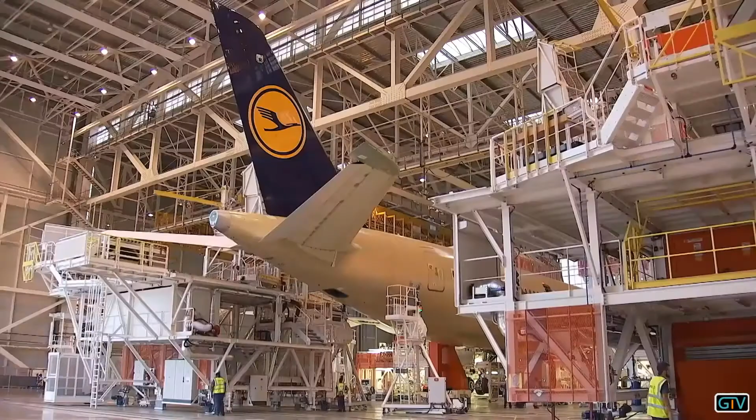Air travel has become an integral part of our everyday lives, connecting the people on our planet. For some years now, competition among airlines has been increasing, competition in which modern super airliners play an important role. The Airbus A350 is one such super airliner. Germany's largest airline has already ordered a significant number of these new long-haul aircraft. But can the airliner meet the high expectations?

The A350's first official flight goes from Munich to Hong Kong. The high-tech jet now has to prove itself under real conditions: a direct flight and a stress test with a duration of 12 hours. It's the most modern commercial airliner on the market.

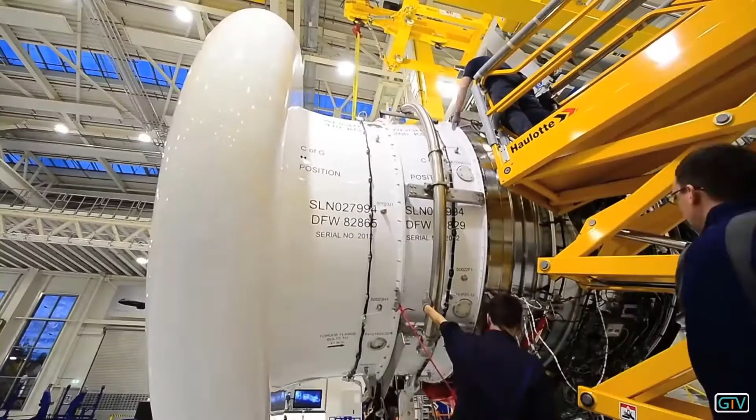The engines from Rolls-Royce have been completely redeveloped and enable the aircraft to carry out extreme flight maneuvers. We'll be pushing the aircraft to its limits here. On a test flight, the new A350 is rolled to a bank angle of 67 degrees.

There are also improvements for the passengers. More space and larger HD monitors are just some of the features. But the current super airliner from Boeing also has a lot to offer: new, larger windows and a completely new lighting concept for passengers on the 787 Dreamliner.

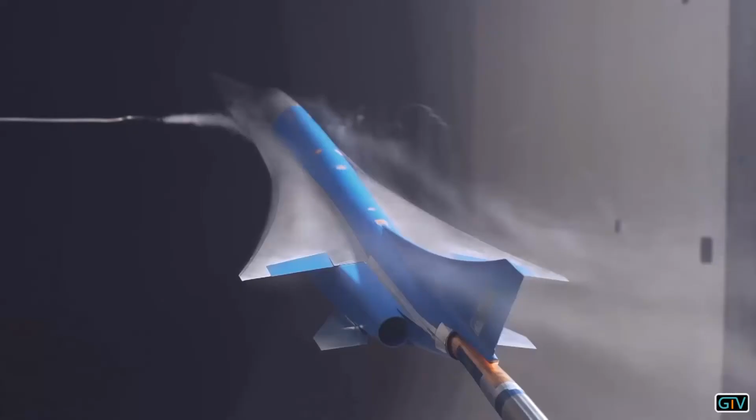London to New York in only 3 hours, possible only by flying at twice the speed of sound. But that's only the beginning. In the near future, even flying drones will help alleviate the traffic chaos in our cities. And developers are looking even further into the future with their concept plane, an example of what the future could look like. This future, we will build it together.

The super airliners for the new millennium are ready to hit the skies.

The Airbus factory in Hamburg. The city on the River Elbe is the third largest construction location for civil aircraft in the world. Around 12,000 people work here in development, design, and final assembly. Besides other aircraft, 2 super airliners are being produced on the 19 square kilometer site: the biggest passenger aircraft in the world, the A380, and the new long-haul jet, the A350.

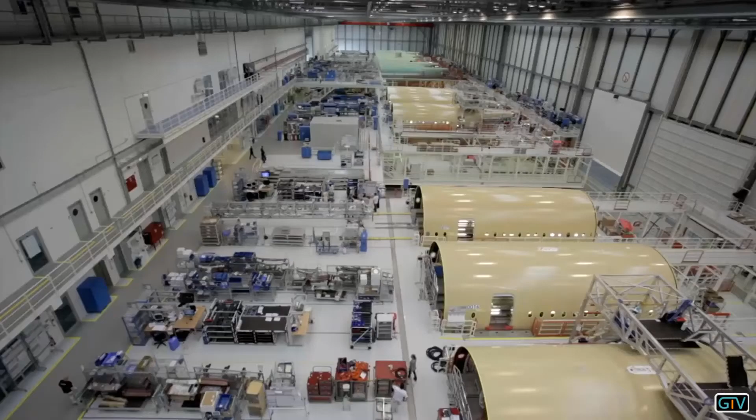There was even a new assembly hall built especially for their manufacture. Here, the mechanical and electrical systems are installed for 2 fuselage sections: the forward section, which starts behind the cockpit, and the rear section behind the wings. At first sight, the individual fuselage sections all look the same, distinguished only by their different production numbers. Everything runs according to a fixed assembly schedule, which begins with delivery of the front fuselage section.

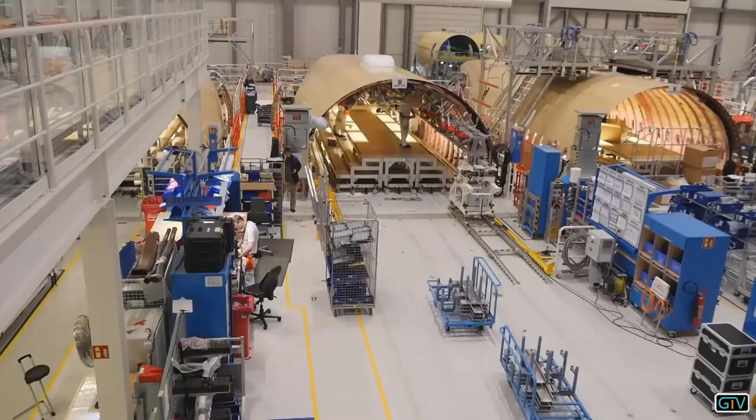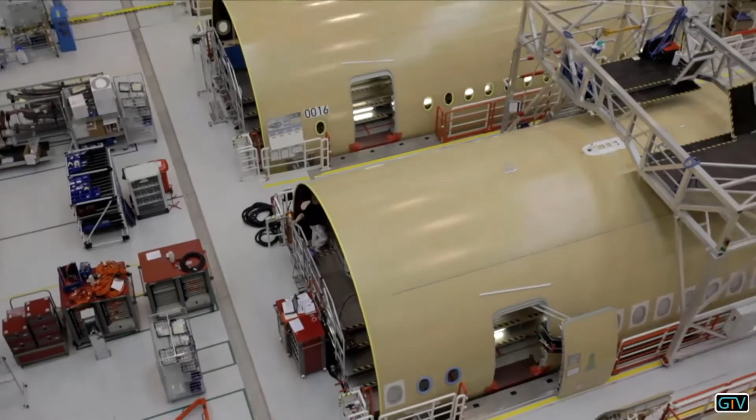The staff here refer to this as the barrel, in which they gradually install the various systems. That is now much faster than in the old assembly hall thanks to the new construction method. For the fuselage and wing structures, more carbon fiber composites are used than in any other commercial airliner.

After only 12 days, one fuselage section leaves the Hamburg works and is flown to Toulouse by the Beluga transporter. This production speed, however, is only possible by using the assembly method known as module integration.

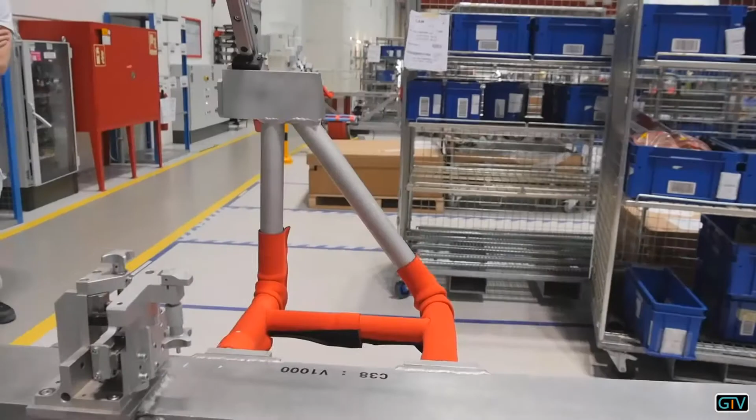That's a very special assembly method here in aircraft construction. The A350 is currently the only program carrying out installation this way in the entire Airbus group. In these frames, cables are laid, air conditioning ducts mounted, and small control devices installed.

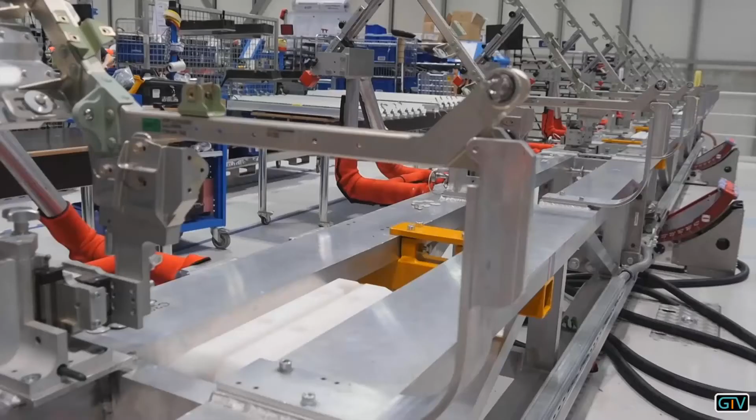The benefit is that there's no more overhead work, as the modules are only installed in the cabin ceiling at a later stage, a great relief for the technicians. However, everything is still installed by hand.

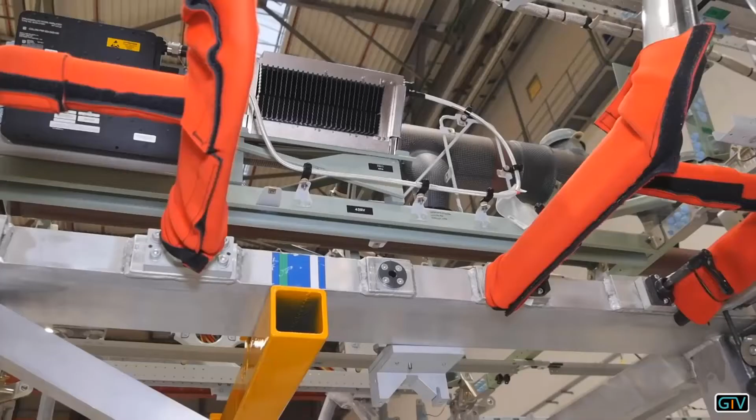The cables are bundled into so-called harnesses and then ducted before these harnesses are also installed into the modules. Each individual line is then checked once again by technicians before being installed in the barrel. If everything is okay, green labels are attached with the letters GTI printed on them.

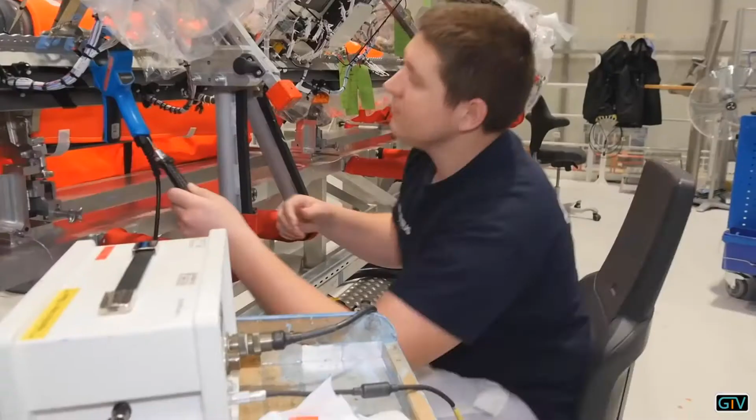GTI stands for Ground Test Instruction, and there's a precise definition for the way we have to check our contact resistances and the rest of the electrical equipment. Electrical resistance is measured at various points with the help of a measuring device. This resistance measurement is extremely important for safety during flight operations.

If the contact resistance or general resistance is too high, or the currents flowing over them get too high, as in a lightning strike, it would lead to a lot of heat developing here, and that's definitely not something we would want in an aircraft.

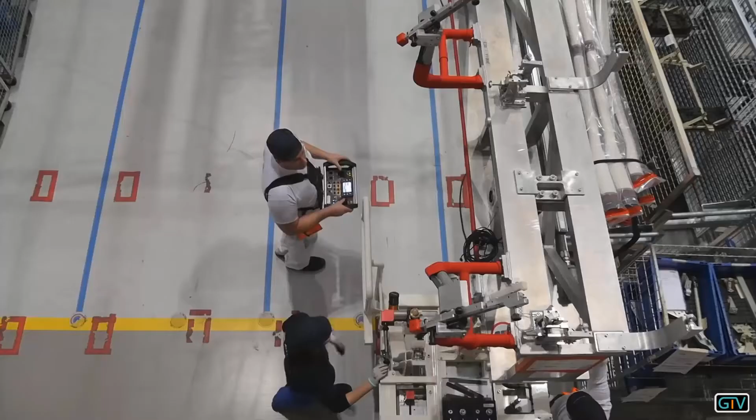Once the module has been assembled, it's carefully transported by crane to the A350 fuselage. The time saved by this new assembly method is enormous. The manufacturer now delivers more aircraft than ever before. A350 production alone now sees 10 aircraft completed every month. This is also due to the passenger cabin being assembled parallel to the fuselage, wings, and tailplane.

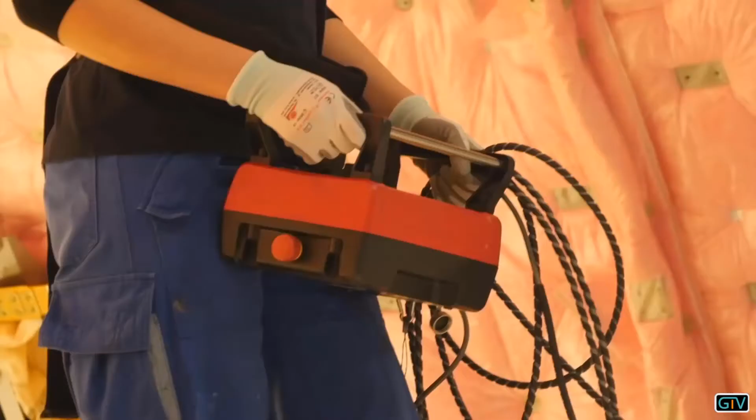Now the retaining bolts are removed and the module is slowly edged towards the fuselage. There are currently 3 versions of the aircraft available. Here, the middle version, the A350 XWB-900, is being built for Lufthansa.

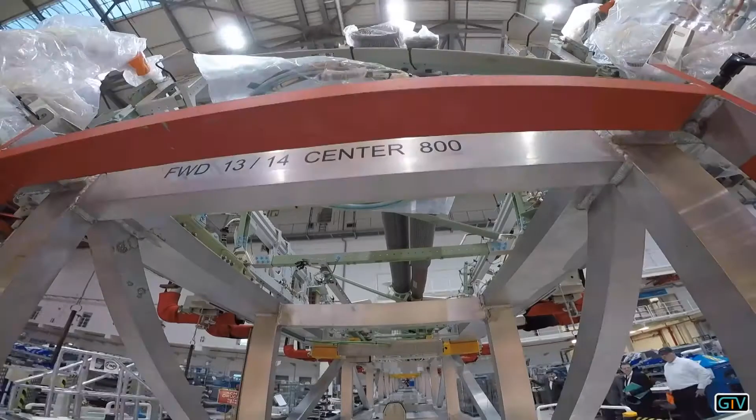The module is slid into the fuselage on a rail. Nothing must go wrong now. The slightest error could bring the entire production to a standstill. The technicians are all highly focused because the safety of future passengers depends on this.

Minor deviations in the height of the module are corrected using adjusting screws. Hundreds of cable harnesses are still hanging down from the module ceiling. They will soon all be laid individually by hand.

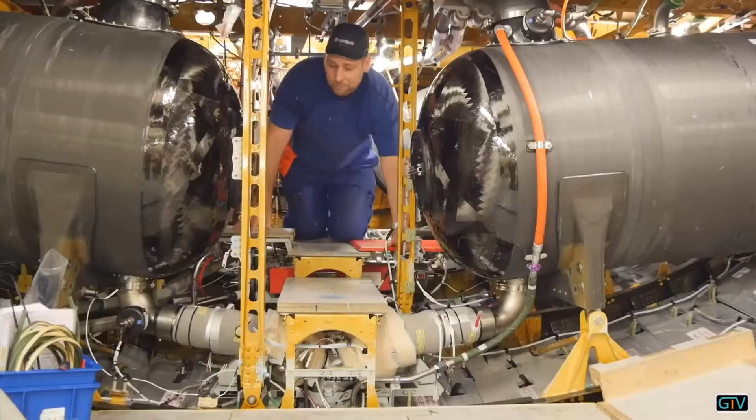While work goes on in the upper section of the cabin, in the lower section everything is finished. We're here in the plane's cargo section, where all kinds of systems are installed that passengers don't get to see. In the rear section, there are the fresh and wastewater tanks.

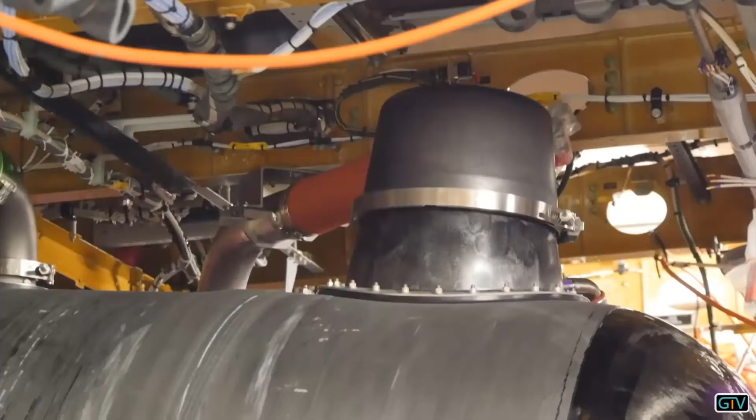There are 2 freshwater tanks installed here, a larger and a smaller one. The larger tank holds about 800 liters and the smaller one around 600 liters. We allow about 40 liters per passenger.

Under this floor paneling is where the A350's oxygen supply is installed. The supply lines are well protected in the middle of the fuselage. Here too is all the cabling for the cargo system. This automatically guides the freight containers into the fuselage and ensures the load is correctly positioned.

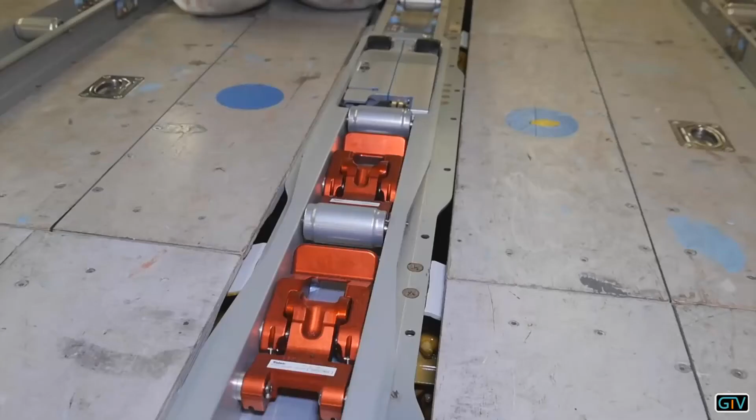Here we've installed the cargo loading system. These are the roller conveyors. They consist of different compartments where the luggage or the freight can be loaded onto, and so it arrives at its destination safely without slipping.

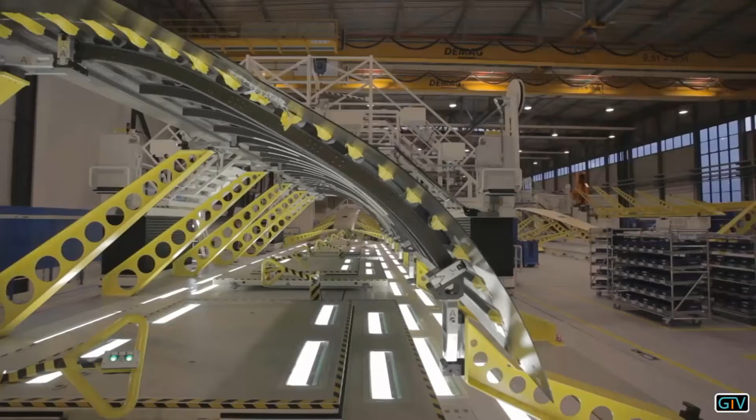After 15 years of development, the A350 will now succeed the Airbus A340 as the new super airliner. The way it's produced is also completely new. New materials demand new manufacturing methods. Special bolts are used to connect the fuselage sections.

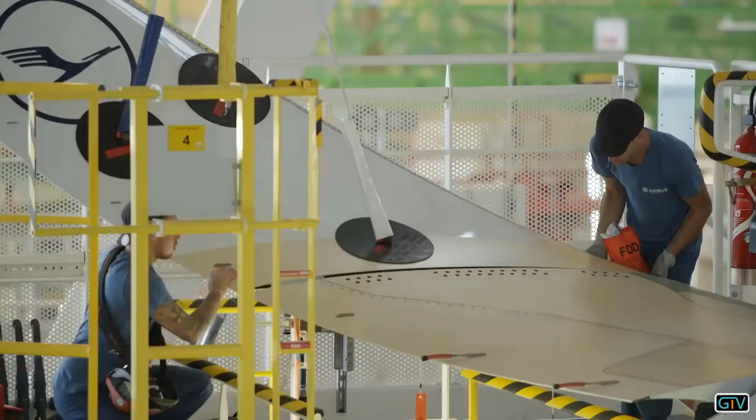The A350 also has reinforced high-speed wings. They are made of CFRP, a carbon fiber reinforced plastic, making them suitable for higher speeds. The extremely smooth wing surface the CFRP creates results in less air turbulence, which in turn means reduced air resistance and consequently more lift. This guarantees greater stability and at the same time 4.5 tons less weight.

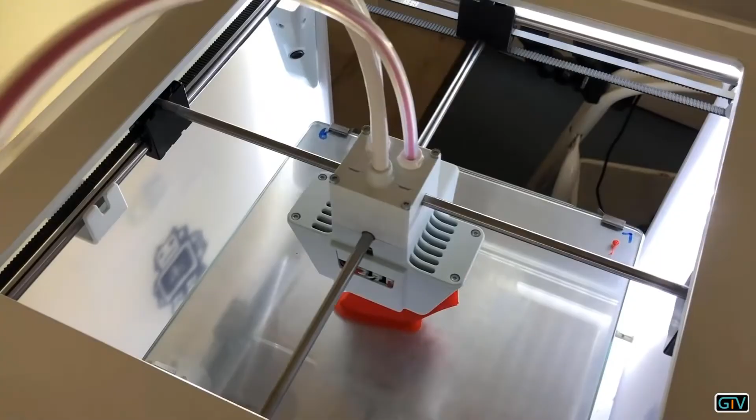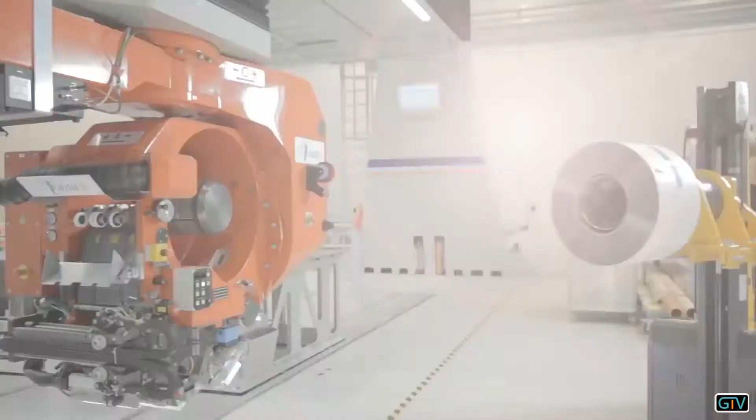To build these wings, a completely new process is used. Similar to the principle behind a standard 3D printer, the wings are built up layer by layer. Here, a small model of an aircraft wing is produced, but in the plant at Stade near Hamburg, the upper level of a full-sized wing is printed with the help of a giant roll of adhesive tape.

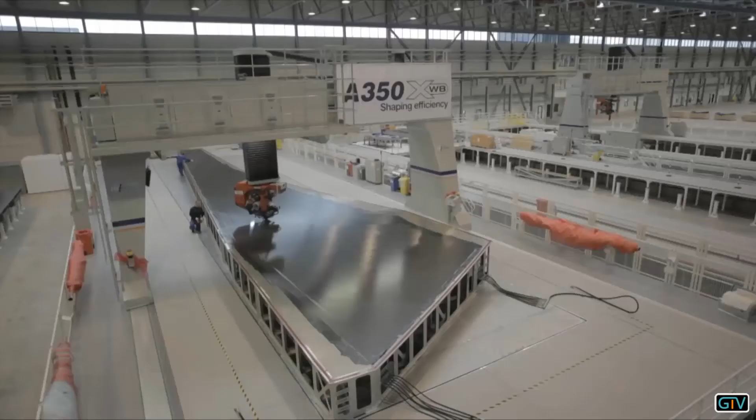On each of its long sides, there are 12 rotating spools which unroll black strips of CFRP. Large aircraft manufacturers are increasingly using this material to save weight, kerosene, and money. CFRP is stronger and easier to work with than aluminum or other metals. It's also much lighter. In the development of the new super airliner, cooperation with the various airlines is extremely important.

It's a continuous process. Based on our experience in daily scheduled operations and close contact with the manufacturers, Airbus, we help to develop new solutions for future aircraft, which can then later be found in our own fleet.

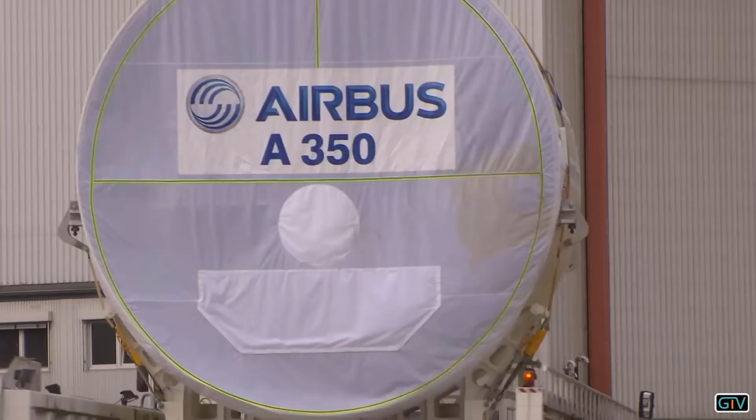All A350 parts manufactured in Hamburg are flown to Toulouse for final assembly. This is where the super transporter Beluga comes into its own. The Beluga is the aircraft manufacturer's backbone. It can carry up to 47 tons of freight, the equivalent of about 10 fully grown elephants.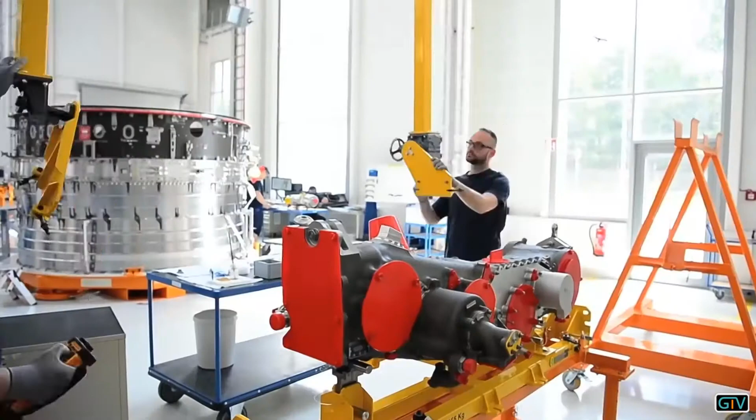Rolls-Royce MTOC in Dahlewitz-Brandenburg is the location for assembly of the new A350 jet engine, the Trent XWB. The airliner has 2 of them. Dahlewitz is the 3rd largest of Rolls-Royce's production sites. 2 XWB-type jet engines are built here every week.

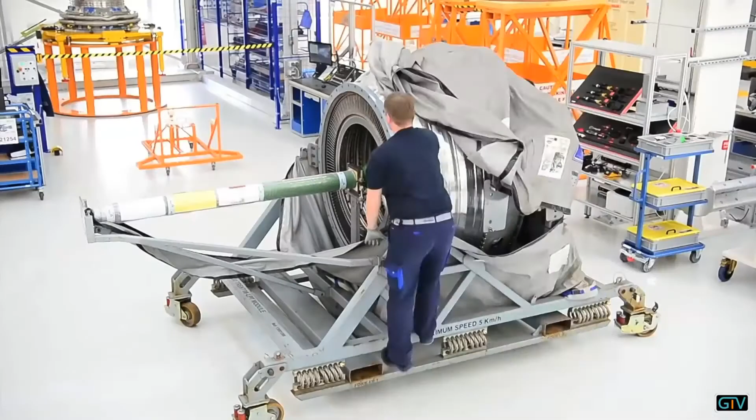With a diameter of over 3 meters, they are among the largest and most modern jet engines in the world. Here too, most of the work is carried out by hand. Around 70 highly qualified engineers and technicians work here, putting together thousands of individual pieces like a huge 3D puzzle.

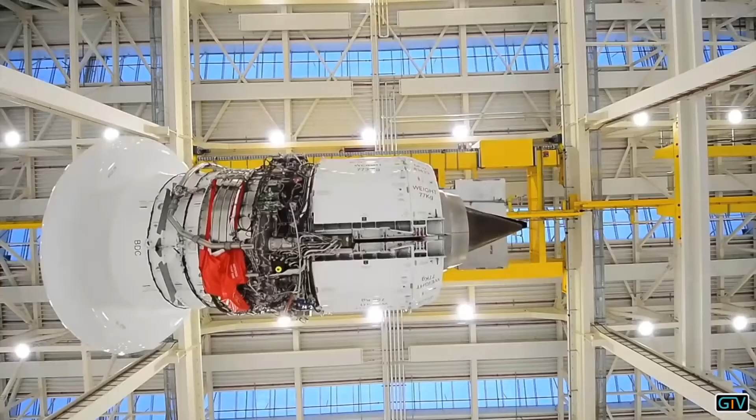After final assembly, the engine is tested thoroughly. Up to 40 different tests can be carried out in this 7,000 square meter facility. Only when all of them have been completed successfully is the engine transported to the Airbus factory in Toulouse.

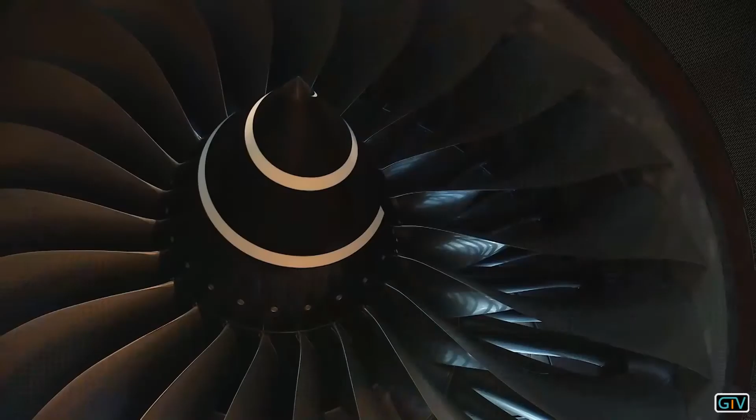Toulouse in southern France. This is the aircraft manufacturer's largest production location. It even has its own airport. The engines delivered by Rolls-Royce MTOC are now mounted onto the A350. A short time later, the new aircraft stands completed on the apron.

She's been given the name Bonne. The technicians have just installed the improved sharklets. Their special shape causes less turbulence and so reduces air resistance. The air flows more evenly past the wingtips, which increases the plane's range and reduces its fuel consumption.

Calculated in terms of consumption per passenger over 100 kilometers, the new A350 uses just under 2.5 liters, which at the same time enormously reduces its CO2 emissions.

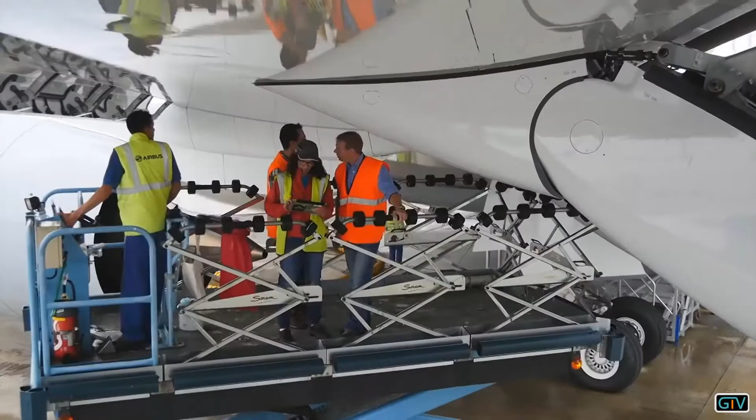In Toulouse, in the pouring rain, the final checks for the new airliner are underway. Everything is inspected and documented meticulously. As the machine is being delivered to the airline today, its own technicians are examining it particularly closely.

I'm in charge of quality check for the A350 here at the final assembly line and for deliveries. And you've just seen me up on the fin where I checked sealants and paintwork to see if anything's flaked off here and there.

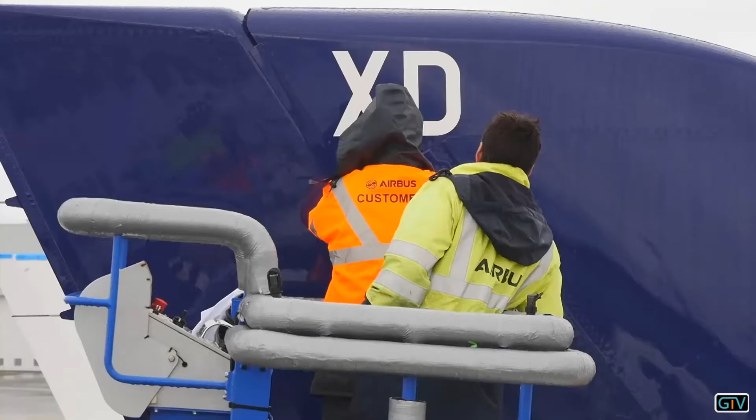Minor problems are marked with green adhesive tape. At a price of 265 million euro, nothing is left to chance. To assess the paintwork better, it first has to be wiped dry. A slight scratch is visible on the back of the rudder. Nothing serious, it's marked and will be polished out later.

Meanwhile, in the nose cone, the plane's radar system is being checked. It is located in the cone directly in front of the cockpit and is essential for information on weather conditions and airspace control. The inspection is completed and the test crew are very satisfied.

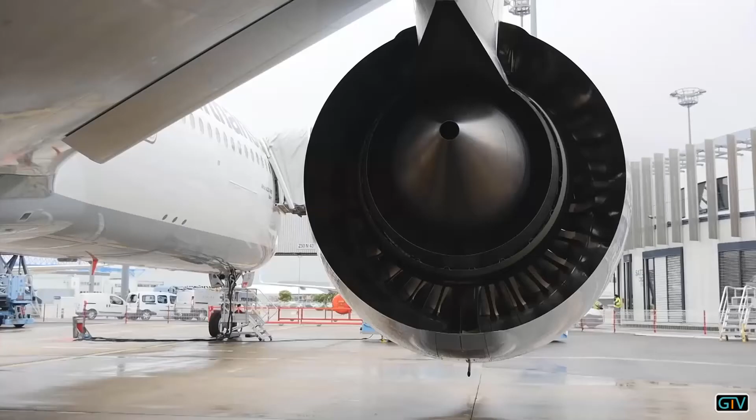The aircraft is now ready for takeoff. At the briefing, the planned test flight is now discussed down to the most minuscule detail. I'd suggest, first of all, that we do a pull-up, plus 0.5 G. Yeah, I got that. This particular maneuver briefly creates weightlessness inside the craft.

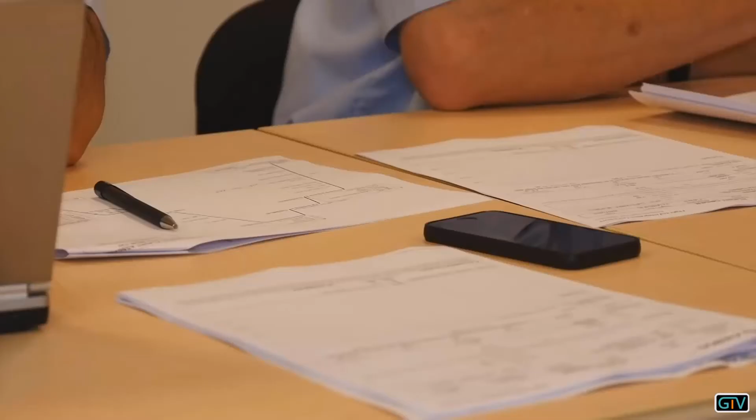Then they plan to roll the plane over on its side. A lot depends on the weather, which currently doesn't look too good in Toulouse. Benna Opsmeier is the captain on the flight and has years of experience. Taking account of the weather conditions, the flight plan is modified slightly so that all the tests can be carried out.

This test flight is all about flying to the aircraft's limits, checking the so-called protections, the safety systems. An aviation engineer is also on board. My role on board is the flight test engineer and the test conductor, guiding the different sequence. An important task for the test flight ahead.

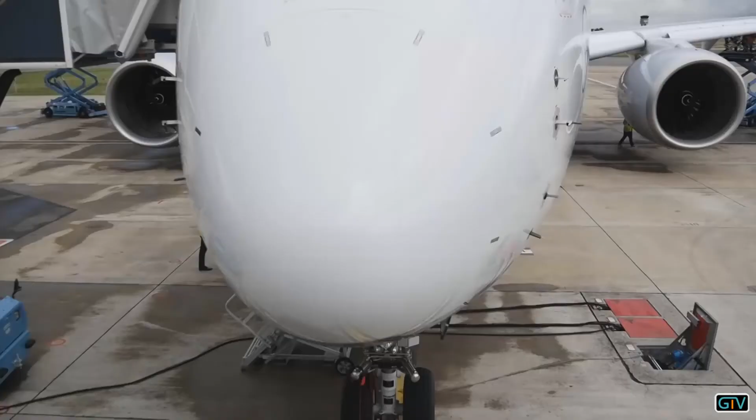The pilots are ready and start preparing the A350 for takeoff. This test flight is also the acceptance flight. Only if everything goes smoothly and no major malfunctions or problems occur will Lufthansa take the aircraft.

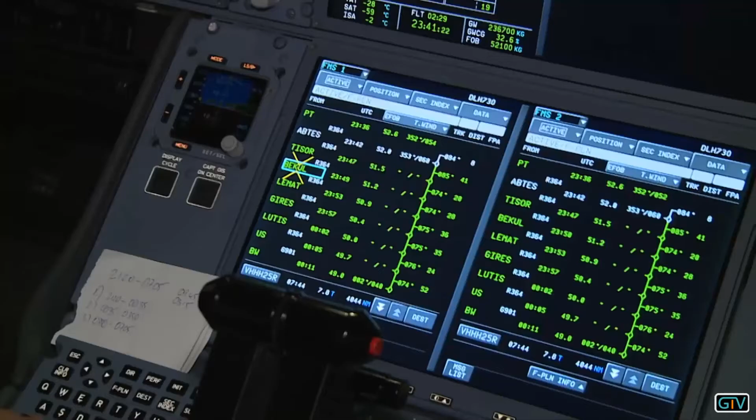The cockpit design has changed slightly and is now a two-person glass cockpit. A new feature is the mushroom-shaped mouse control handrests, which are also used in the A380. The display is made up of 6 38-centimeter LCD monitors. The content can be selected freely by the pilot.

The aircraft slowly moves off. Everything looks good, and the pilot gives the order for takeoff.

While the landing gear is still being retracted, the first readings come through. Engine performance, speed, and cabin pressure are all within the normal parameters. The new Rolls-Royce engines and optimized aerodynamics reduce the aircraft's noise footprint by 30%, putting it well below the legal limits. The first test is a tough one.

The aircraft flies horizontally at maximum speed, around 900 kilometers an hour, and then goes into a climb. After only a few seconds, it reaches the apex of its trajectory. The engines are now throttled back so that the thrust only compensates for the air resistance. The nose of the plane now points towards the ground again.

In this phase, a clear reduction in gravity can be experienced in the cabin, almost like in freefall. Towards the end, the pilot pulls out of the dive by raising the elevator and ramping up the engines again. Test successfully passed. Now it's on to the next challenge.

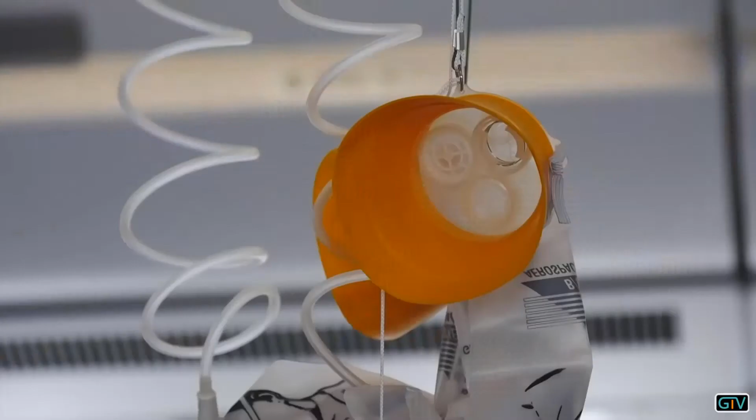In today's test, only one of the many oxygen masks is released. The others have already been tested and found to be working perfectly. In an emergency, the aircraft's automatic system takes over.

All the tests have been completed successfully and the team returns to Toulouse. After a 2.5-hour flight, the aircraft touches down at the company airport. A total of more than 40 different tests and maneuvers have been carried out.

The crew is satisfied, and the plane can be taken over by Lufthansa. However, there are still a few minor issues to be sorted out. After landing, everything is carefully checked and examined once again. To cool the machine down quickly, all hatches are opened and covers removed.

Time for the test crew to evaluate the data and make a final assessment. There's always a great feeling when you see the plane flying at its limit.

Martin flew it really well again, along with Wolfgang Abtsmeyer. It's quite frightening when you're at an angle of 67 degrees and you can see France flying by down below. That's what makes for really excellent flying with this aircraft.

Competitors Boeing are also relying on high tech and have built their own new super airliner, the 787 Dreamliner, which also boasts lower fuel consumption thanks to modern materials. These advances increase efficiency, simplify the operation of the aircraft, and provide noticeable improvements to the passenger's experience.

One of these innovations are the 787's new larger windows. Most people are going to say, I really like the windows. And they will, and that'll be true. But there's a lot more going on besides the windows that you can't even see, that we did on this airplane. And you're just going to feel better, and you're not going to know why.

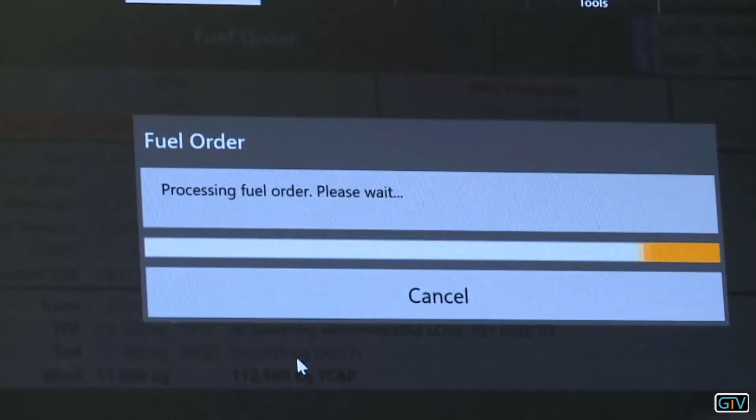So you've not flown the new route to Hong Kong yet either. Neither have I, but I was involved in the calculation. So I think we can order the fuel. Would you agree with 71 tons? Right, I'll enter that then.

Not long until takeoff. In a final meeting, the latest flight and passenger data are checked. The flight attendants are divided into teams, and the special features of the new aircraft are discussed once more. It flies faster than other aircraft and only takes 10 hours 30 minutes from Munich to Hong Kong.

Then the crew make their way to the brand new plane. The A350, named Bonn, has only just been delivered to the airline by the manufacturers. It has a completely new, wider fuselage, new high-speed wings, and newly developed engines. Fueling is already underway.

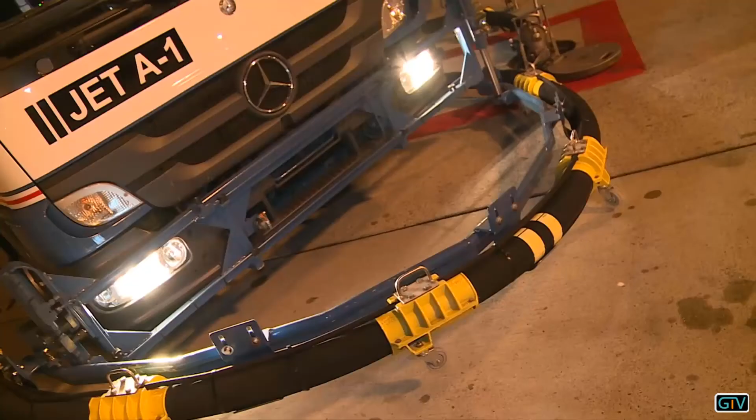Before takeoff, Captain Jasper carries out the so-called ground check, in which he personally inspects the exterior of the machine once more. Obviously, I can't see inside the system, but there are certain places you can look at to make sure they're in order, indicating the general condition of the aircraft.

The A350 Bonn is ready for takeoff. The pilots take up their positions in the cockpit. For safety reasons, there are always 3 pilots on long-haul flights who alternate regularly.

The final provisions are stowed away in the cabin. It's all brand new on this aircraft. You notice that as soon as you come on board, everything smells new. We're very proud that it's the staff based in Munich who are the first to fly on this plane.

And now the first passengers also come on board. The flight attendants have to deal with a completely new system. Though it's all been practiced in advance, things are often different in reality. Some things are not where they should be, but in general, everyone is satisfied.

It's definitely very pleasant, there's more space. Of course it's a change from the A340, because there are 2 galleys here now, at least in the new business class. The caterer has delivered the food, the cockpit crew is ready for takeoff, the passengers are on board, the doors are closed, we're taxiing, and I'm really looking forward to our flight to Hong Kong.

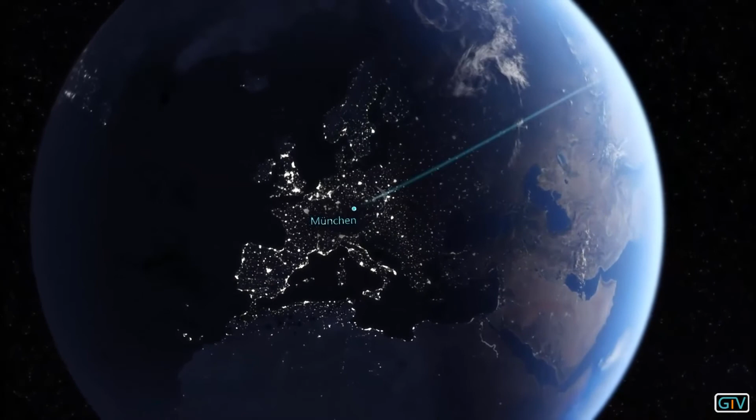With 325 passengers on board, the aircraft taxis to the runway and sets off from Munich to Hong Kong. On her first regular flight, she will cover some 9,000 kilometers without a stopover.

Speed has always fascinated people. Ever faster cars and high-speed trains seem to make distances shrink. In commercial aviation, too, things are happening. Boom Technology is building an aircraft to fly from Munich to Hong Kong in just 4 hours.

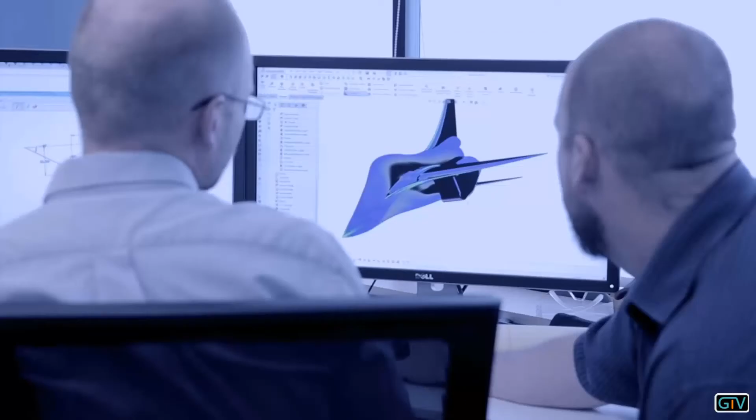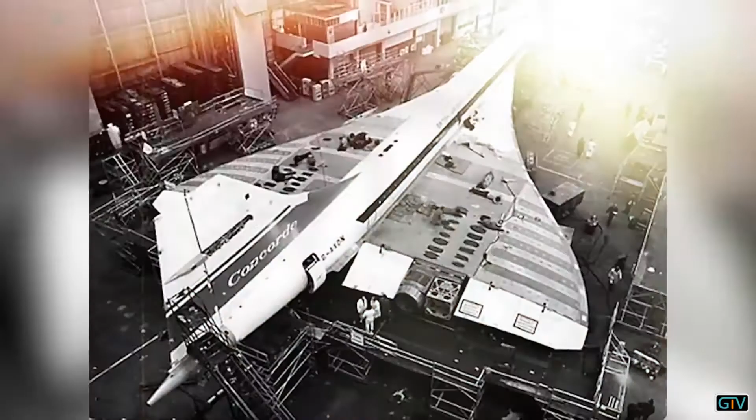To accomplish our goal of affordable supersonic travel, we challenged our engineering team to create a design at least 30% more efficient than Concorde. Concorde was the world's first supersonic passenger airliner. It went into service in 1976, covering the Paris to New York route in less than 3 hours.

After an Air France Concorde crashed in July 2000, the service was discontinued. For the first time since Concorde, supersonic passenger flights could soon be in the skies again. The U.S. company Boom believes new materials are the key to achieving this.

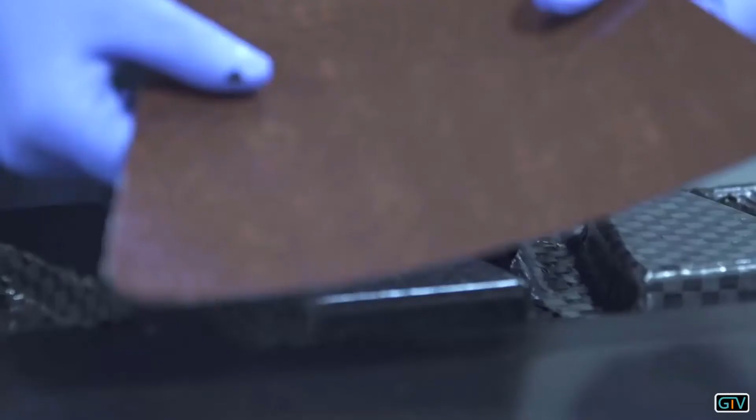Carbon fiber composites allow us to realize the aerodynamic design with a strong, lightweight structure. To create a carbon fiber part, we first start with a high-precision mold, either CNC machined or 3D printed. We then apply layer after layer of carbon fabric and resin to the mold. Finally, each part is cured in an oven or autoclave under vacuum at temperatures of up to 450 degrees Fahrenheit.

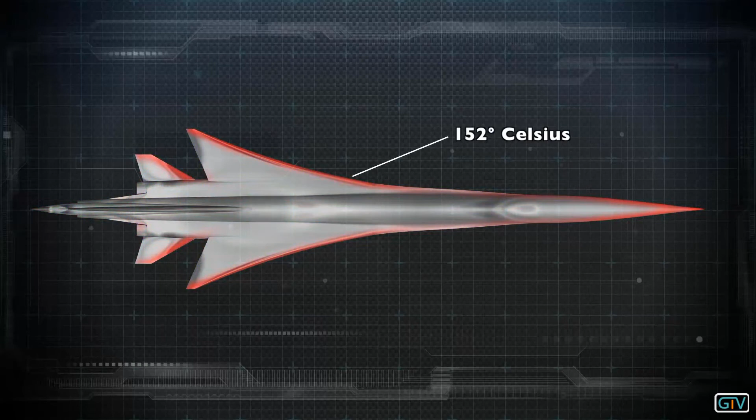Cruising at 1,451 miles per hour, the nose and leading edges of the aircraft can reach temperatures of up to 307 degrees Fahrenheit. These carbon parts outperform aluminum at the high temperatures of supersonic flight.

The propulsion system is composed of a variable geometry intake system and an efficient turbofan jet engine. Our engine is based on the same technology that powers modern subsonic aircraft, but with a customized fan and a variable geometry exhaust. Lastly, we use 3 engines for added reliability and safety - 2 engines under the wing, and a third in the tail.

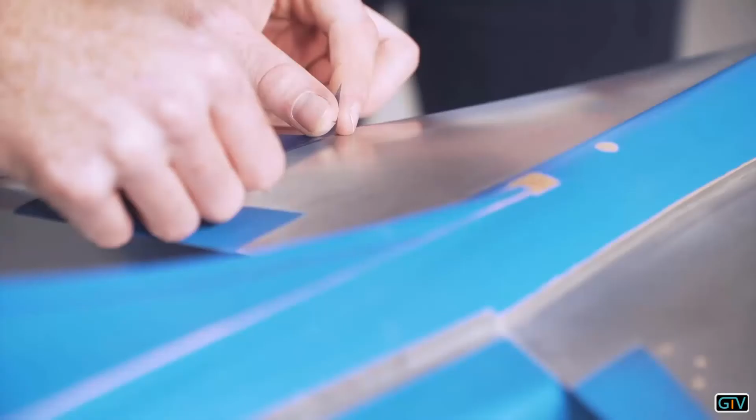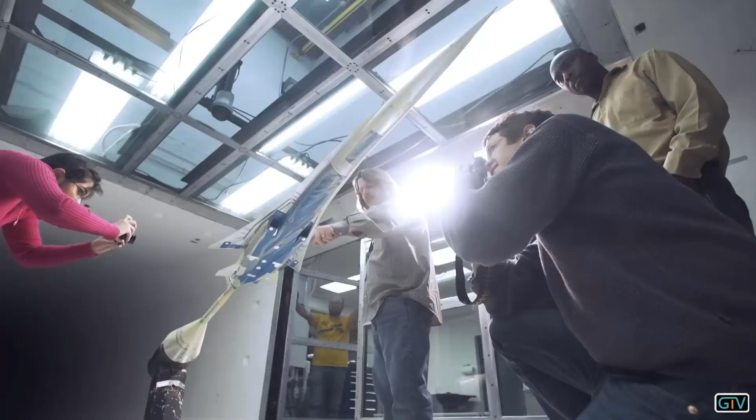Before actual construction of the new super airliner can begin, a lot of testing has to be carried out in the wind channel. A small model is built and covered with different materials. This is done to determine the behavior of different materials under strong wind resistance. If it is torn off or deformed, a better material has to be developed. Testing, however, is going very well.

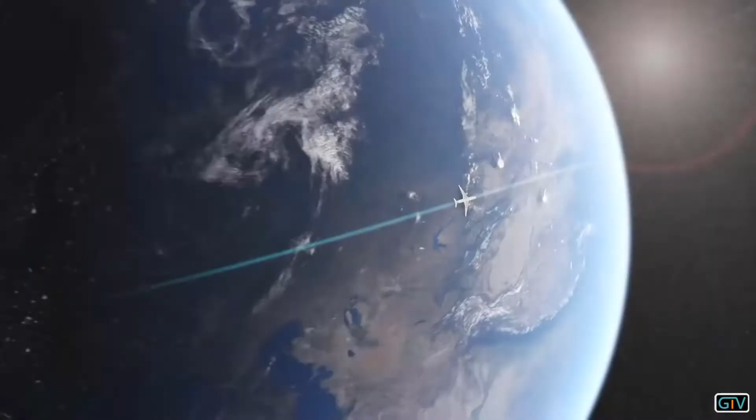With a flying time of only 3 hours from London to New York, the engineers decided against seats with recliner function, preferring instead modern communications technology ideal for business travelers. On its maiden flight to Hong Kong, the A350 isn't quite as fast, flying through the night at 950 kilometers per hour. We're here in the larger central galley.

The A350 has a few new improvements which other airliners don't have. There's a refrigerator where passengers can help themselves. We have a few environmental innovations for disposing of leftover food and drinks. And we also have a self-service area to make sure our guests are always provided for. The air on board is also much better, a luxury that all classes benefit from.

This makes the cabin pressure feel lower, and as this is a long-haul aircraft, it contributes to making the journey in the A350 feel more relaxing. There have been a few changes to the seats too. They are wider and more comfortable throughout the entire aircraft. Even in economy class, new standards of seating comfort now apply. The high-quality mounts and brackets here lead to significantly less vibration in the seats themselves.

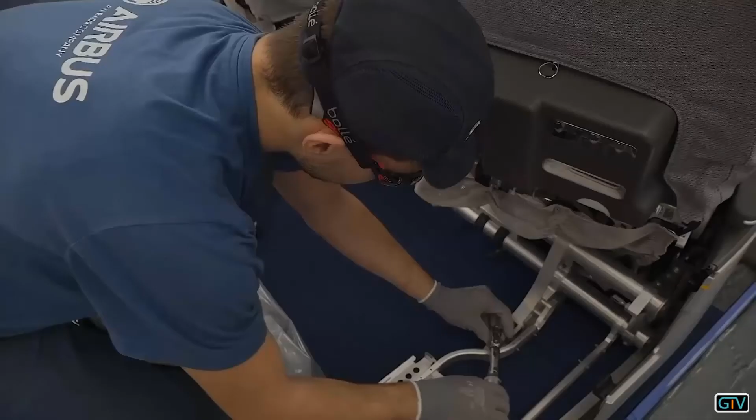We're in economy class today. This would have been business class only a few years ago. If you look at the seat, we have 18.5-inch wide seats, better than any other aircraft flying in the skies today. 17-inch seats have been standard in many aircraft up to now - that's a little more than 43 centimeters. The 17-inch seat is the seat that prevents you from movement, it prevents you from getting comfortable during that flight.

Our industry is changing, and the needs of passengers are changing as well. A study has shown that the sleep phase for people in 18-inch seats is much longer and more intensive than in 17-inch seats. As the research has shown, 1 inch makes all the difference.

Onboard comfort has also improved for the A350 crew. They now have a proper sleeping cabin for up to 6 people. This is the so-called purser bed for me and my purser colleagues, because it's closest to our interphone. The purser is the one in charge of communication, who has to make the phone calls, and this way you can make your own little comfort zone.

Another super airliner is the Boeing 777. Like the A350, it's used by all the leading airlines. The cabin equipment is modular and can be converted as required. In the 777, wider seats and improved cabin air are important features.

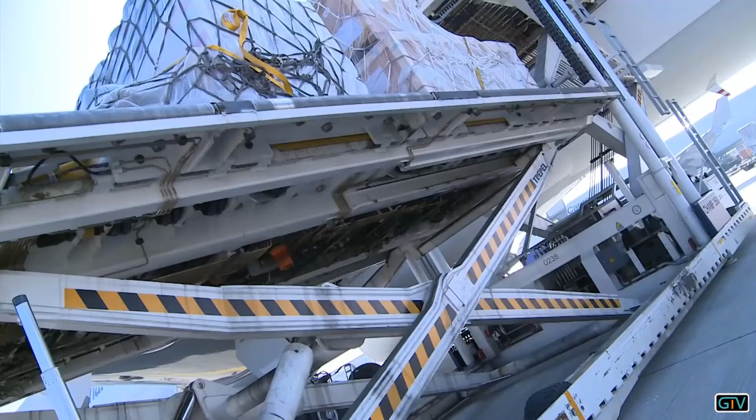The 777 has a revolutionary new loading system, with which freight containers are loaded onto the aircraft by a lifting platform in a specified order. Each container weighs as much as a small car. The heavy containers are first transported to the upper deck of the hold by a sophisticated elevator system and then distributed evenly across its entire area. The procedure continues on the middle deck. Only at the end of the operation is the lower deck filled.

Behind the cockpit, there's a small kitchen through which the crew members can access the hold. Captain Frank Lumnitzer checks the cargo. There's not a lot of space left for him to get through. Anyone used to a passenger cabin will find this a little unusual.

We've loaded 98,700 kilos of freight. I don't know yet the specifics of the cargo. I'll get that afterwards from the handling agent. Ultimately, it's freight that's either valuable or that has to be delivered punctually from A to B.

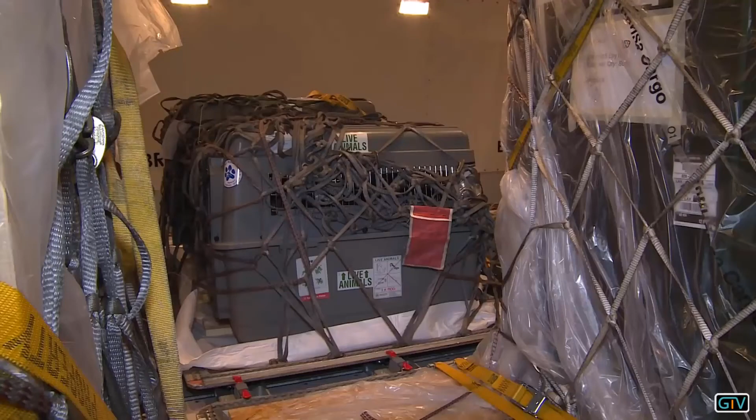In here, two Greyhounds are waiting for takeoff. The freight documents have now arrived and are all in order. So now to the external inspection of the 777.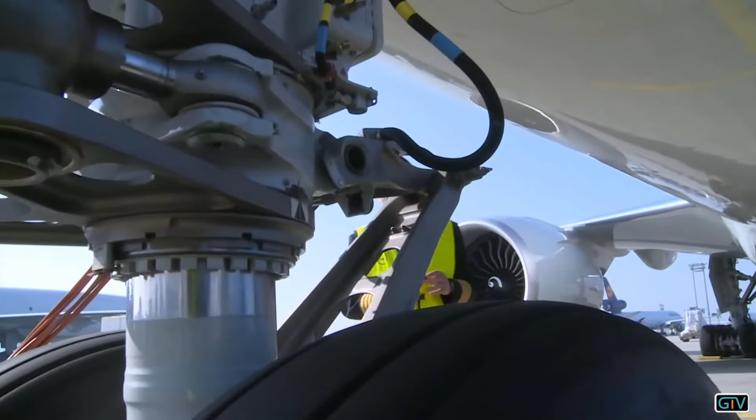A routine exercise for Captain Lumnitzer, who is flying the aircraft to Chicago today. Our technicians have prepared the aircraft, and it's now down to me as captain to get my own impression of the condition of the aircraft.

Boeing 777s are equipped with the most powerful engines available in commercial aviation. They have a diameter of well over 3.5 meters and generate thrust of over 110,000 pounds.

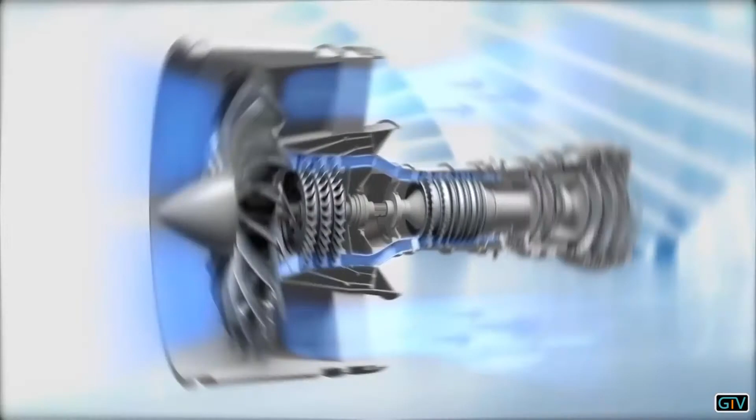What makes this General Electric engine so outstanding is a special kind of air compression. Air is continuously compressed over a number of individual compressors, also known as fans, before it's mixed with kerosene. This mixture is ignited and drives the turbine. The turbine exhaust then provides additional thrust and turns this engine into a super engine.

The Boeing 777 is now ready for departure. So, it's time to go. We're off to Chicago, and we want to be punctual. With a range of 11,000 kilometers, the 777 operates a network of almost 300 destinations from Frankfurt.

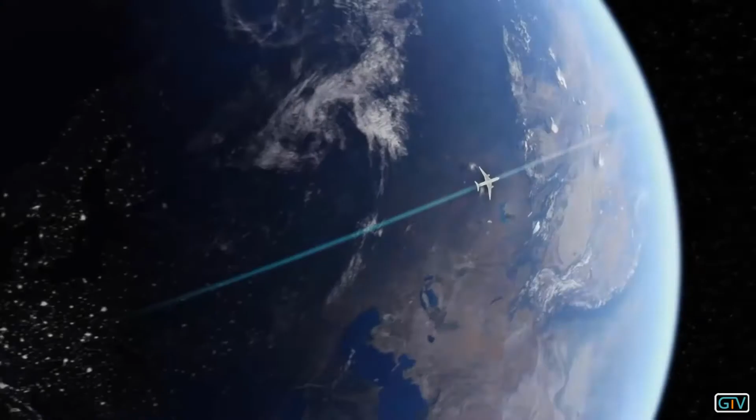Back on board the A350, Hong Kong is already drawing much closer. The plane is just crossing the foothills of the Himalayas. Below us, the 6-kilometer high Tibetan plateau, but the aircraft is running well, the systems are working excellently, and the fuel calculation we made in Munich seems to be working out.

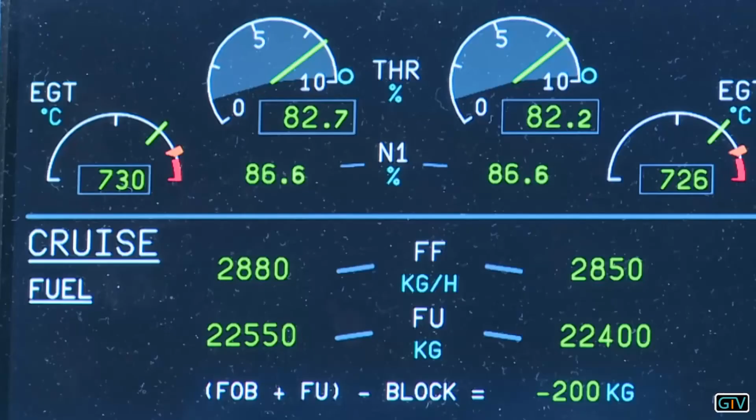We'll have enough reserves when we get to Hong Kong. All the other parameters are also keeping the pilots in a good mood.

This is the most modern commercial aircraft currently on the market, and you can really see that too. When I compare it with all the other models I've flown so far, like the A340 or the A330, this is a completely new generation, with a cockpit very similar to the A380.

That's due, amongst other things, to the mouse control and freely assignable monitors. The automatic height control for both pilots is in the middle of the control unit. There's also a kind of tablet on each side of the cockpit on which the pilots can look at map material.

The aircraft now begins its descent. The map of Hong Kong Airport has been loaded to prepare for this.

As expected, the aircraft held up very well and flew reliably. We're now on our approach and will soon have completed 10.5 hours of flying. And of course, I'm looking forward to the landing and our stay in Hong Kong.

But unfortunately, the A350 has to take a slight diversion. The airspace over Hong Kong is so crowded that the aircraft has to circle amidst the clouds. Time for the pilot to switch to manual control. In the clouds, visibility is down to zero and the pilot has to rely blindly on his instruments.

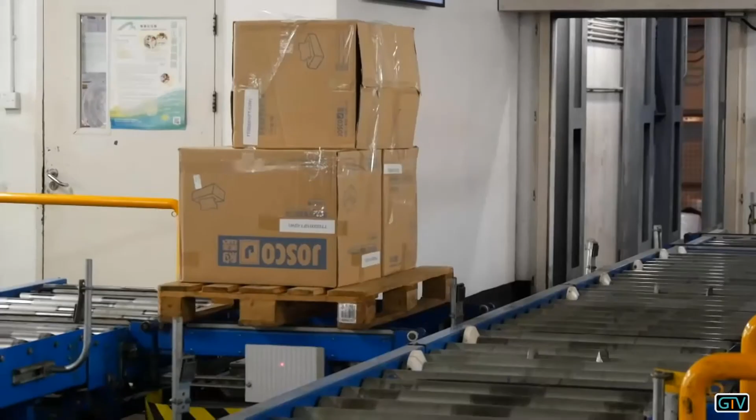Right near the airport is the base of LSG Sky Chefs. The catering business is a Lufthansa subsidiary and the largest supplier of onboard catering services, with a worldwide market share of 20%. In 2017, the 35,000 employees produced around 696 million meals, achieving a turnover of 3.2 billion euro.

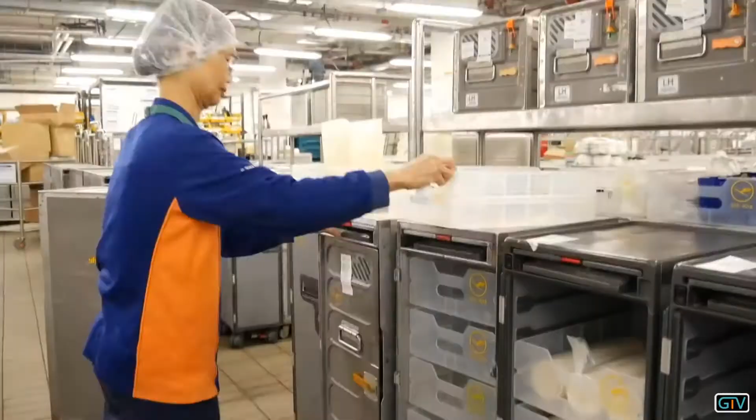The LSG Hong Kong warehouse has absolutely everything. Here, the catering for the return flight of the A350 Bonn is being prepared. The trolleys are still empty and have to be filled up with glasses, drinks, and snacks. Following the packing list from Lufthansa, we follow the part number indicated, and we pack according to all the items here and also the quantity.

Every day, cutlery for over 10,000 passengers has to be cleaned and packaged, all by hand.

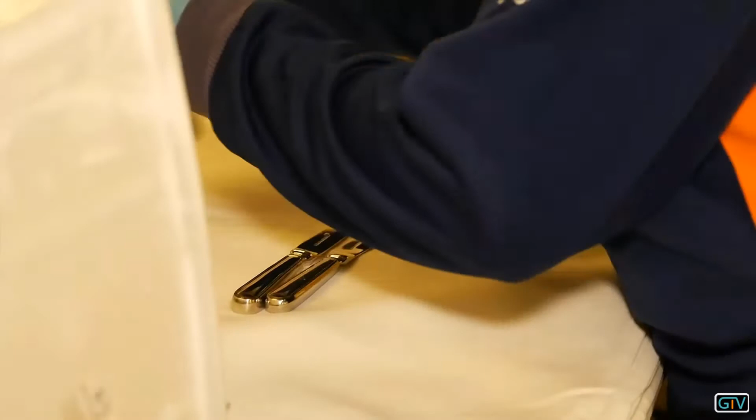Cooking for extreme conditions: at an altitude of 10,000 meters, the sense of taste is altered by low pressure and low humidity, and the effect of spices is weaker. The chefs know exactly which strong flavored dishes bring the taste buds back to life. Rolls and side dishes are freshly made and then individually packaged, more than 10,000 every day. The sauces are also a little thicker, so they won't be thrown off the plate during turbulence.

It's more challenging every day than being executive chef at a hotel, because you need to satisfy so many different customers every single day. The chef is always there, keeping a watchful eye on the preparation of his creations.

I can't cook everything alone for the airline, all right? So I have a team, but I need to make sure to bring what I want, my vision of the food I have for the customer, so they can produce exactly the same.

All the food for the return flight of the Bonn to Munich is prepared by 3 chefs at the same time, and this is just for the business class passengers.

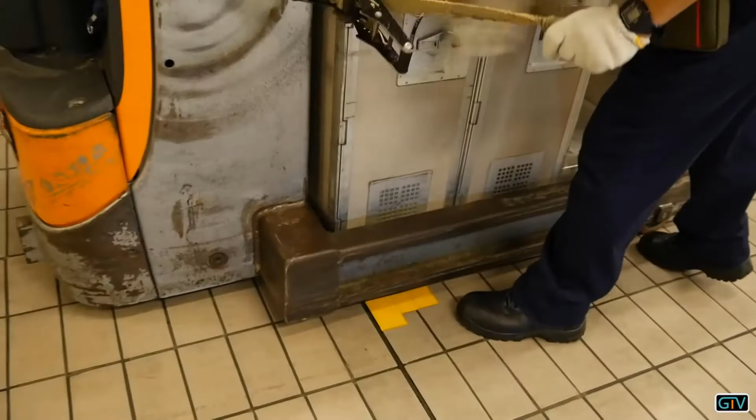The trolleys are packed and can now be loaded. Through long corridors, they are taken to the refrigeration carrier. In the control center, the orders and alteration requests are processed. With so many flights and meals, it's extremely important for the chefs to maintain an overview.

Let's say for Lufthansa, we have 66 business class. We produce for 66 business class. Maybe there are 40, we have 26 extra, but this is a top-up.

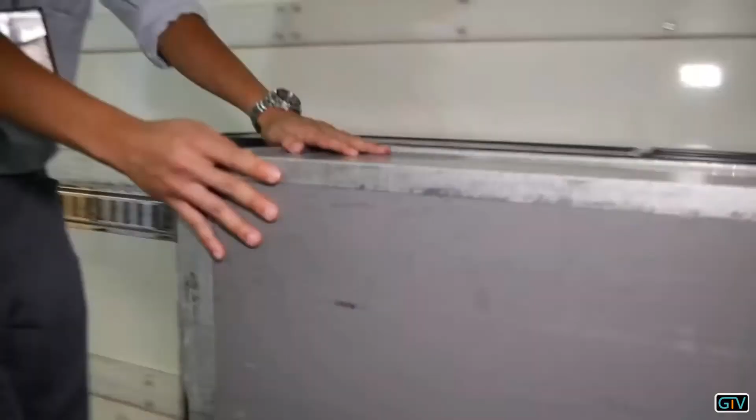Safely packed onto the trolley, the Bund's onboard refreshments begin their journey to the airport. There's still time; the Lufthansa A350 doesn't leave Hong Kong for another 90 minutes, so loading can be carried out as scheduled. One trolley after another is loaded onto the refrigerated truck, then they drive to the airport.

The LSG refrigerator trucks dock onto the A350 and the food is unloaded. Meanwhile, the crew is back on board the Bonn and is preparing for the return flight. In only a few minutes, everything is finished and the aircraft sets off for the runway.

After her successful maiden flight, the A350 will from now on fly back and forth from Munich to Hong Kong on a regular basis.

Demand for modern airliners is growing. China in particular is ordering various aircraft models in increasing numbers. In fact, the People's Republic has only recently taken delivery of its 50th A330. This development has prompted the manufacturers to further optimize production.

First of all, we continue the ramp-up of the A320 to be ready to deliver on our commitments in 2019, which is 60 aircraft a month.

Another very important subject is the future of mobility. Aircraft manufacturers want to test new concepts for improving short-distance travel. We now start to take care of the full mobility experience as long as flying is involved. So we look at things from door to door, including ground transport, security, operations at the airports, doing the flight, but making it an experience for the passenger.

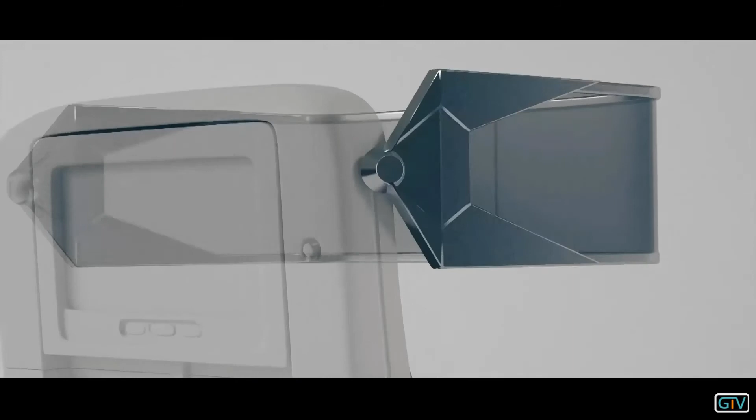On display in the so-called cocoon, the flight attendants can read any special wishes a passenger may have. Lowered, the cocoon greatly enhances passenger privacy. At the same time, its display makes the onboard entertainment system a very different experience. During takeoff and landing, the seat automatically reports whether all passengers have their seatbelts on or not. The seat's colored light signals also make boarding and leaving the aircraft easier.

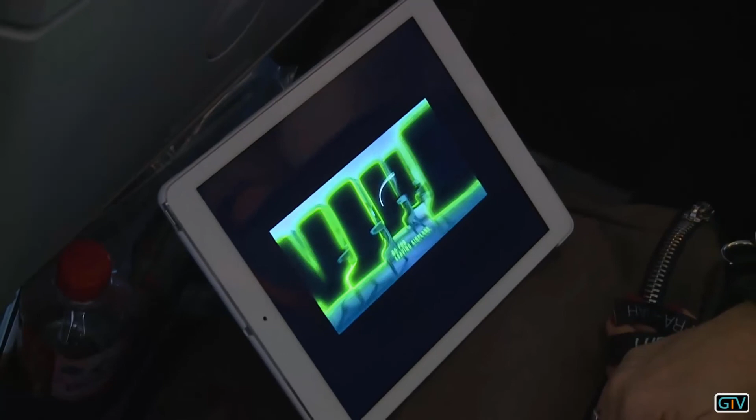Basically, it's about technology, it's about research and technology, it's about investing in innovation, and it's about people. It's about getting and retaining the best talents, being able to attract the talents and the technologies of the future to help us build the aircraft of tomorrow.

A leap forward to the year 2050. What will the super airliners of the future be like? Transparent walls, bioactive seats, interactive onboard entertainment, and plenty of room for passengers could all become reality very soon.

This concept plane has already been developed and presented to the public. People really saw how the future could look like and also saw all the opportunities of the future. Virtual reality, playing golf, transparent windows. Interesting also question about social media. Will Facebook replace actually meeting?

And the answer is no. We need still to meet and make the journey as short as possible, door to door, including airports, immigration, check-in, not just the flight, but the complete experience.

There still seems to be a long way to go from the A350 to the concept plane, and the airlines are helping to speed up this development. It's a continuous process based on our experience in daily scheduled operations and close contact with the manufacturers. We help to develop new solutions for future aircraft, which can then later be found in our own fleet.